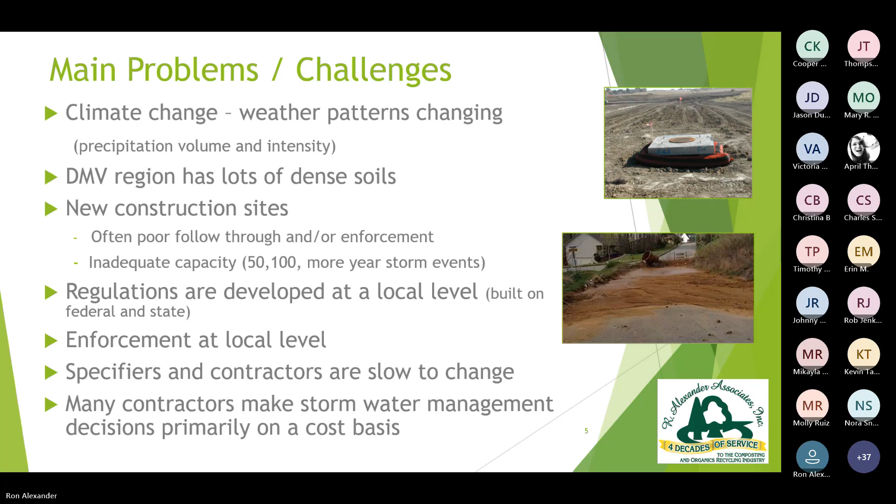I mean, if people remember the major storms we had several years ago in Ellicott City, where there were two 500-year storms within like 3 years, you would think that a lot of states would be ramping up their stormwater requirements to say if you build, you have to have capacity for a 100-year storm. But I was just doing a project here in North Carolina, and we're still regulating for 10-year storms, which is crazy to me. And on top of everything else, amping up stormwater law is very, very slow because it costs money to customers. But the downside is when things go wrong, the damage for not having the infrastructure can be pretty, pretty bad.

At many, many levels of government, we understand that stormwater is a problem. You can even go to the Department of Energy and Environment website, and you can see there's pretty detailed information up there on the concerns and how to deal with stormwater.

And we'll get into it a little bit more, but there are major economic issues as well as environmental issues, as well as clean water issues when it comes to managing stormwater properly. If we whittled it down to three major areas to consider, the first is water quality.

Research has shown the more soil that moves, the more stormwater that doesn't get absorbed properly and runs along the surface of the soil, the more sediment goes along with it. It directly impacts the amount of pollution that gets carried, whether it's pesticides, nutrients, metals. So protecting water quality and drinking water even is a major issue.

Then we have protecting man-made structures, including landscapes. I would argue that improved stormwater on large landscape projects can be sold as insurance, because if we don't absorb water effectively on landscape projects, we have a lot more long-term damage on the landscape projects.

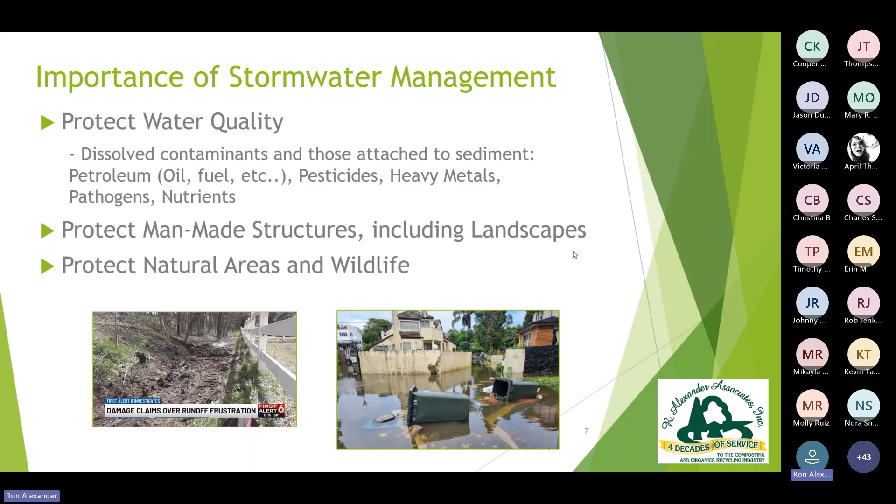And then, of course, we're also trying to manage stormwater to help manage and protect natural areas and wildlife. But there are human health issues related to it also. There's lots of ways to deal with stormwater. Obviously, gray infrastructure is primarily what we've had up until about 25 years ago.

The West Coast, especially the Northwest, the state of Washington, some places can get up to 100 inches of rain a year. Even though their intensity is low, they get a lot of volume. I've done a lot of work out in that part of the country, and we're trying more and more to use sustainable landscape practices, green infrastructure practices, to help manage stormwater.

And of course, we've had great success using these technologies to manage volume, including peak flow, right? The highest amount of flow that happens during a rainstorm, which we attempt to manage, and minimizing localized flooding. And then, of course, we also try to manage the water that moves through those systems and decrease pollution. And the systems work quite well.

We are still working hard at learning and getting better at maintaining the systems. This is something that's often forgotten in green systems, and we are getting better. But the concept of some of the sustainable management type systems is to imitate nature. Our goal here is to create some large stormwater management features that work like wetlands, for instance.

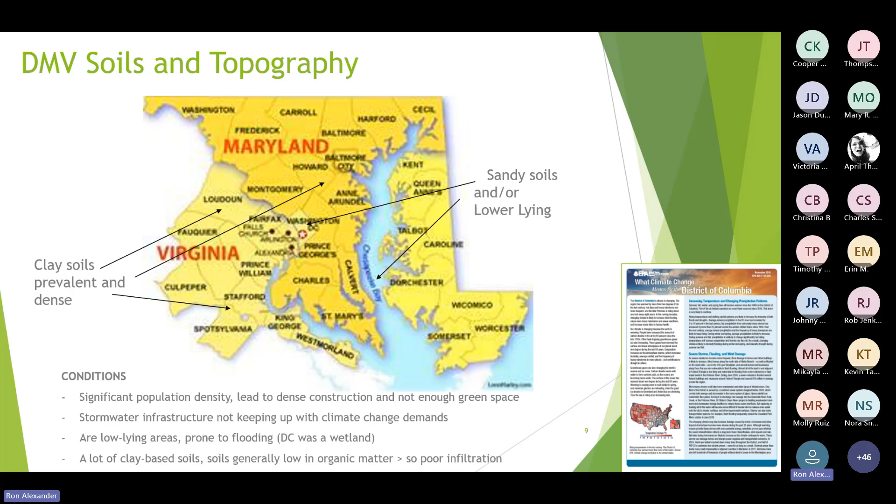Now, going back a few years ago, I did a bunch of work with the Washington State Department of Ecology, and they had major issues with damage to the Puget Sound, which is the bay, which has huge environmental relevance for both people who come and tour the region around Seattle, and also the spawning and the growth of not only shellfish but also salmon. They were looking for new methods to deal with erosion control and stormwater, and they got very, very heavily into creating infiltration soils.

And I'll just mention briefly some of these graphics you see here. One of the things we had to do is educate the construction industry about what really happens to all this water when we start building and we have more hard surfaces. Well, the easy answer, of course, is instead of moving vertically through decompacted soils, the water runs horizontally, and when it does, it picks up velocity and it takes contaminants with it to low-lying areas, often streams and things like that.

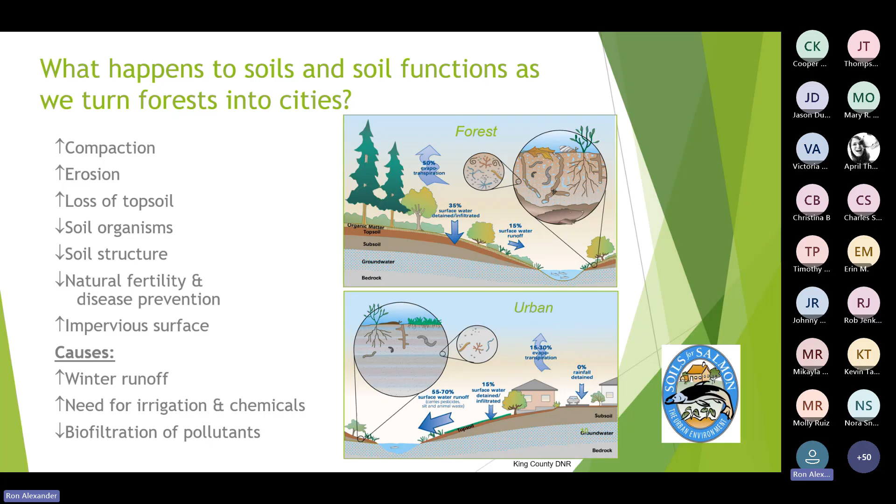So we have major erosion control problems, loss of topsoil, and it causes a whole bunch of issues, including runoff, and the need for more irrigation. If water does not perk, we need more water to grow plants through irrigation. We have more problems with recharging aquifers deep under the ground, and we just have more pollutants moving. So here are some graphics that they've shown. Now, here, impact can be quite bad.

I mean, we talk about things that happen on landscapes, but down here in North Carolina, because we have heavy clay soils like in your region, people have heard about what happened in Asheville. We're getting mudslides. We have the Blue Ridge Parkway, where people come to watch foliage, where parts of the roads were covered with mud or just basically collapsed. So the issues can be small to extremely, extremely relevant.

But when it gets down to construction projects and landscaping projects, if we don't deal with the stormwater, we have unhappy customers. And one of the things we had to do out west, legislation was going to be pushed through that said you will enhance stormwater management, which was going to cost more money. The allowance of using soils that infiltrate, the addition of materials to the soil to improve percolation, was approved as an allowable stormwater management technique.

One of the things that I was involved in doing is educating builders who were going to have to deal with soils differently, but help them understand that they can sell the benefits of this to their customers. And there are landscape architects, landscapers and contractors on this webinar right now. We need to consider the marginal increase in cost to deal with some of these green infrastructure techniques for larger projects, and it is marginal.

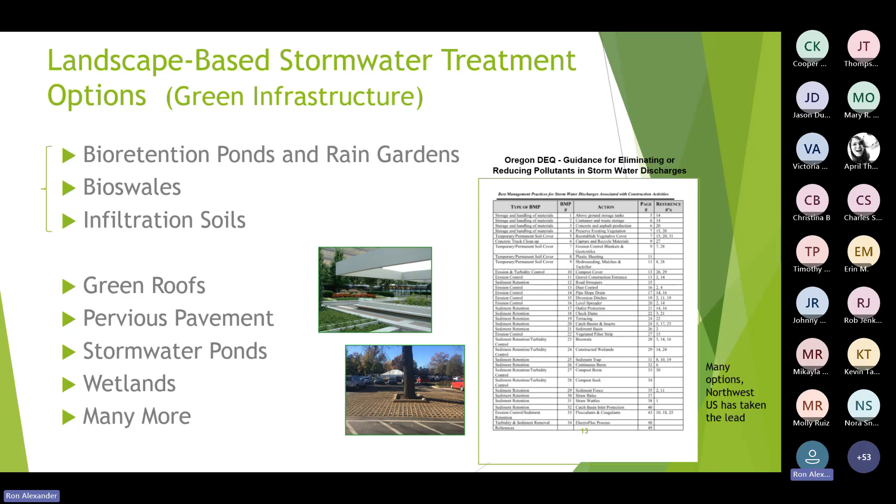Now, on the rest of the webinar today, we're going to talk about these landscape-based stormwater treatment options, green infrastructure. We're going to focus primarily on bioretention, which is extremely popular, and then something that really has a lot of potential moving forward, and that's creating infiltration soils on landscape projects. If you see the document off to the right here, there are a lot of green infrastructure techniques. Each state, and many regions of certain states, have allowable practices that you can gain credits for. And you have to make sure that in your region of the DMV, whichever state you're in, you're meeting the localized regulation.

So bioretention has become very popular over the past decade. It's a wonderful stormwater treatment process consisting of basically soils that perk, with plant material growing in these manufactured soils to help facilitate infiltration, as well as capture, percolation, and also cleaning pollutants. Typically these retention areas are in low-lying areas, so we're using gravity to help get the water gathered. The goal is to make them physically attractive.

However, I will tell you that I've done a lot of work the past 5 years in California, and we have this constant battle with these bioretention features. We have to make the media that perks water, and we're constantly battling keeping enough water in the system to keep the plant material growing. And that's an ongoing struggle with these systems.

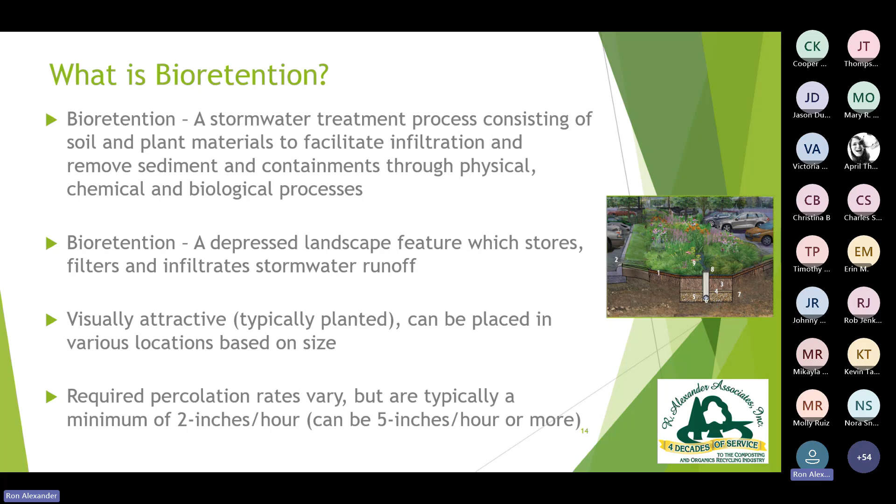And then, of course, based on how we're using the system and what the localized use is, there will typically be a number of inches per hour that the systems will perk. A typical starting point is 2 inches per hour, but it changes based on what you're doing and what your project does.

So typical bioretention features are things like ponds and basins. Smaller versions are, of course, rain gardens. And then we have bioswales, which sometimes infiltrate water, and sometimes infiltrate water and carry water to the larger system. I'll show you a couple pictures of them. But the weird part is that the terminology, if you go to different states and state regulations, these definitions and terms are swapped, which makes it a little bit confusing. But we'll move along anyway.

So here's a great graphic. This is something that's online. This picture is used in many educational presentations, but it's a typical bioretention feature, and it outlines the components. We'll just go through them quickly, and we'll get into a little bit more detail in a second.

So, first of all, you have a bioretention media, which obviously has a lot of sand, coarse textured mineral material in it. On top of that, we have a layer of mulch, which helps protect that layer from erosion and other things. It also can bind metals and such.

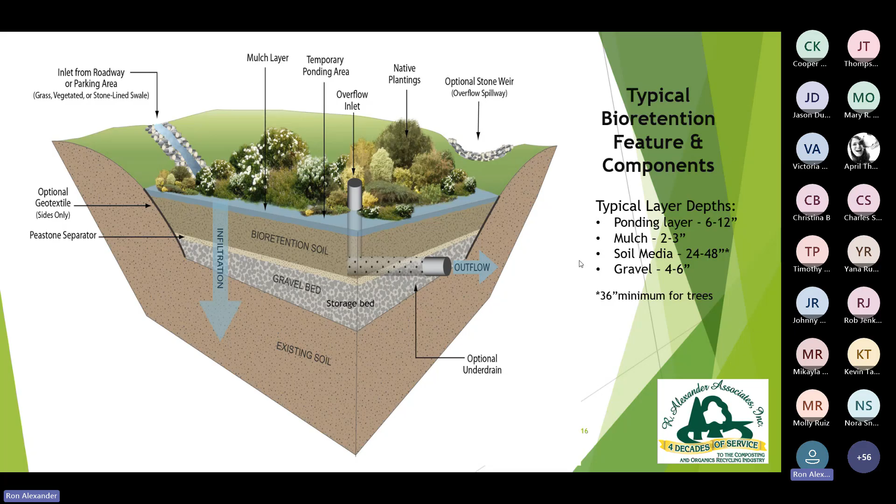So this is a detailed design here. And what you notice to the right here is the general depth of the different layers. Okay, so the design itself should, when done properly, significantly reduce runoff to a site. Water is lost or managed through the bioretention feature through evaporation, through transpiration, water that moves through plants, right? And then the infiltration.

Obviously, if we do it well, we're managing the volume of the water as well as water quality. Keep in mind, certain systems are built with deeper retention areas of media, or water that moves through the media slower by design, to improve capture of certain types of contaminants that are maybe relevant to that specific environmental area, right? So that would be designed based not only on the size of the feature, but the depth of the media and the capture area. It will also be related to the density of the soil below the feature.

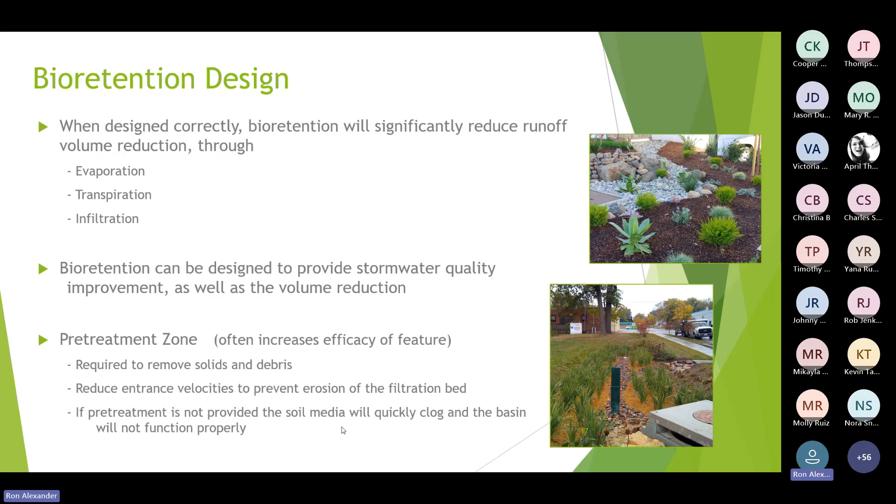And here's a quick comment about that pre-treatment zone again. We very often use rocks and such to slow the velocity of water down, and basically flocculate out some of that media or soil.

Obviously, one of the things we want to have in the bioretention feature is vegetation. We more and more move to native plants, those that can use nutrients that get into the media and don't need a lot of fertility. Also, ones that have deep rooting to help keep the percolation of the media intact, and ones that can be visually appealing based on season of the year.

The mulch layer, again, a key aspect here is to try to use a mulch that is what we call a non-floating mulch, which is a misnomer, a less floating mulch. We try not to use rocks as mulch in these systems. We want to use a mulchy material; stringy materials that hold together and that are a little heavier are often better as they don't float out of the feature. And that's a key aspect of it. So some of these dyed mulches that are very high in carbon, you don't want to use them because they will readily float.

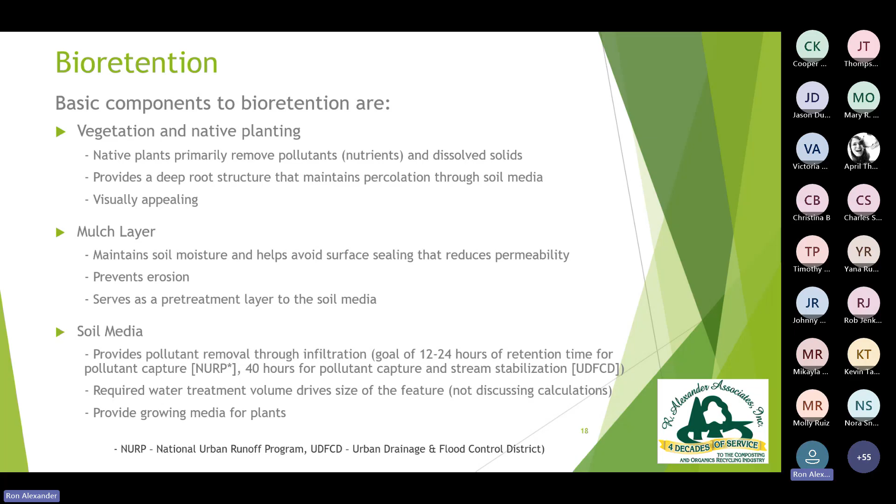Okay. The soil media we'll get to in a minute, but the goal here, of course, is capture and percolation and cleansing, pollutant capture, right? And provide a good, solid growing media for the plants. There's always a controversy pitting the type of the media, the organic content, the potential nutrients in the media, and the health of the plants. And it's a really problematic balancing act that we have to do as we're using these systems.

Again, you can see off to the right there the media going on top of the storage bed, which in this case is a very fine gravel, and also holds an awful lot of water. And again, the two other infrastructural aspects to deal with excess water are potentially under drains and overflow structures, and we don't install them in every application.

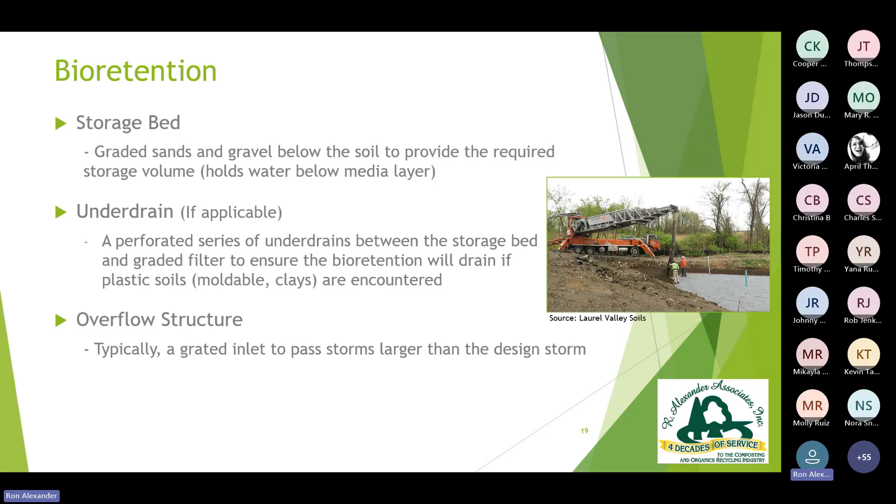One of the key components to the system, of course, is the media. The media is primarily sand-based. It can be anywhere from really 60 to even 80 to 90% sand. Soil is often also specified in the mix. It's typically 2 to 3 main ingredients going into the media. We'll get into that in a second.

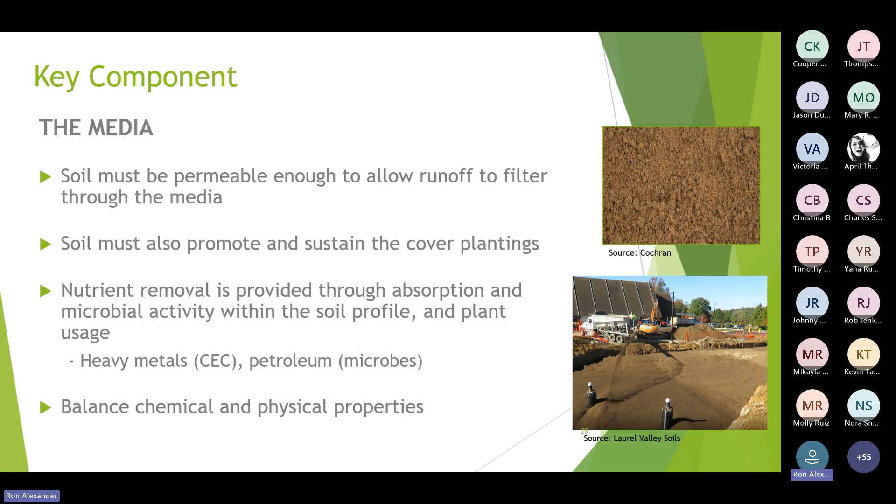And nutrient removal is provided primarily through the absorption to the media and microbial activity, as well as plant usage. But certain numbers of contaminants can potentially leave the systems. And so it's a balancing act to get the highest reduction levels of nutrients and pollutants and keep that system and the plant material growing and the system operating at high efficiency.

Here's a localized spec from the DC DOT bioretention specifications. You'll notice that, again, what I mentioned a little bit earlier, the media is typically 60 to 80% sand or fine gravel. You want to minimize the amount of mineral fines in the mix, which could potentially clog up the movement of water or crust the soil surface.

Down here in North Carolina, we've built a bunch of bioretention mixes, and we tried to get organics out of some of these mixes, and we put clay in instead, and the tops of the bioretention features basically seized up and crusted off, and the systems were not functional. So we're constantly learning how to improve these things. We don't have all the answers. We're getting better and better as time goes on with this.

One of the struggles I've seen across the country is the specifying of the soil component. Typically, there's 2 to 3 components in the media, and getting the soil, which is typically a sandy loam or a loamy sand. In some areas of the country, we just have a really hard time getting soil that meets the spec. So in those cases, we sometimes have to drop down to 2 major ingredients, the organic section of the mix, and then basically coarse sand.

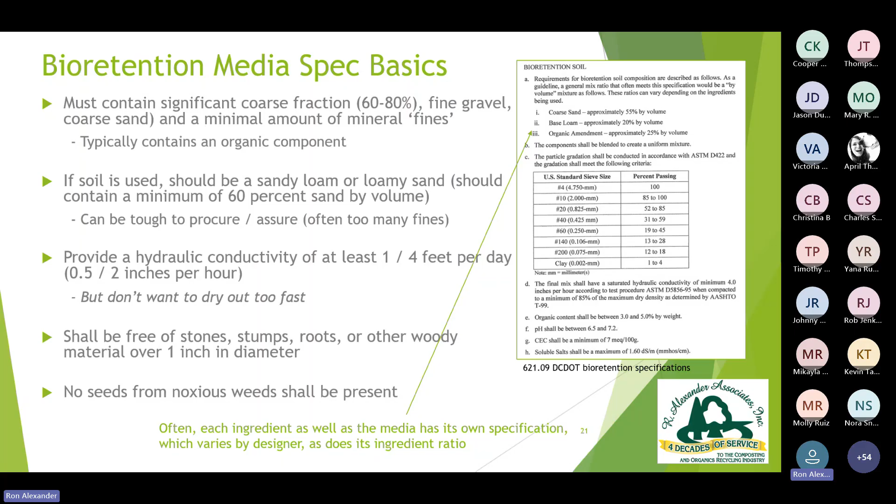And it is important to know that some of these specifications can be quite complicated and problematic to meet. Very often you see the 3 ingredients in that DC spec, the coarse sand, the base loam, and the organic material. Very often all 3 of those materials have their own specification, and then the final media has its own specification. Okay, so it can be quite trying to meet these specifications. And then on the bottom of that spec, you can see things like pH and CEC, cation exchange capacity, right? Salt content, which are relevant to helping the plant grow.

It is important to know that some of the specifications that are written can be quite complicated, and sometimes we have additions. I don't like using the term pixie dust, but we have little minor ingredients that are sometimes added. The new material that's starting to be added are things like biochar. I do not consider that pixie dust, but we're still learning how to use that. I actually think that that's going to be a great additive along with an organic fraction that could potentially degrade a little quicker, the biochar a little bit slower, but we're still learning about this.

And the more complicated that we make the media without really good data backing up what we're doing in that design, the higher the cost, the harder it is to get companies that will actually bid on projects and build those mixes. So we have to be careful and smart as we're designing these mixes.

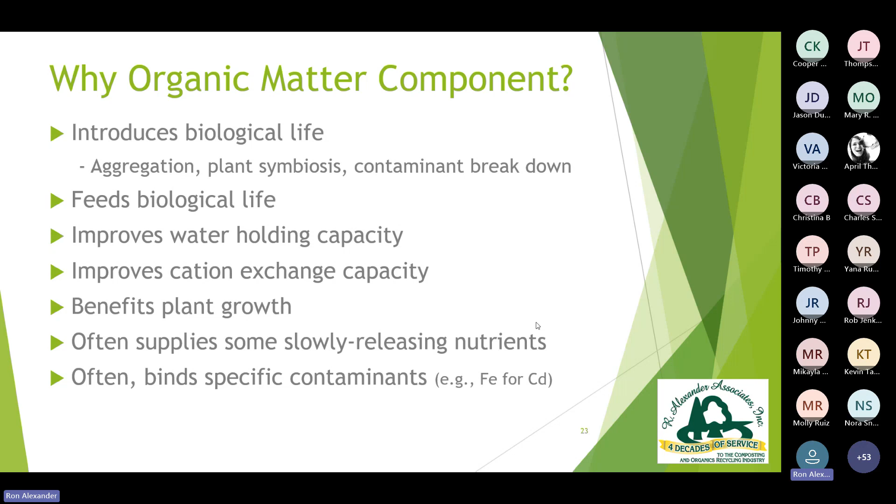And some of these materials provide slowly releasing nutrients. We'll talk about this more in a little bit. And some of them actually have certain metals like iron in them that are really, really good at the capture of other metals like zinc and cadmium. Okay, so there's a lot of benefits, a lot of reasons why we use these materials.

Here are a couple standards from the DC DOT manual. Again, there's compost, which has been used for years now, off to the left, as you can see, and then there's an alternative material which Bloom Woody Blend actually meets and is currently being used for. So these are already being spec'd.

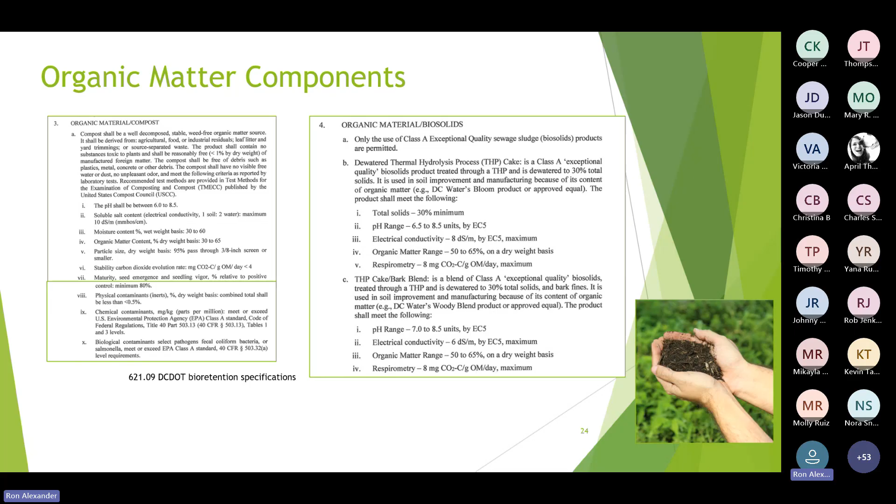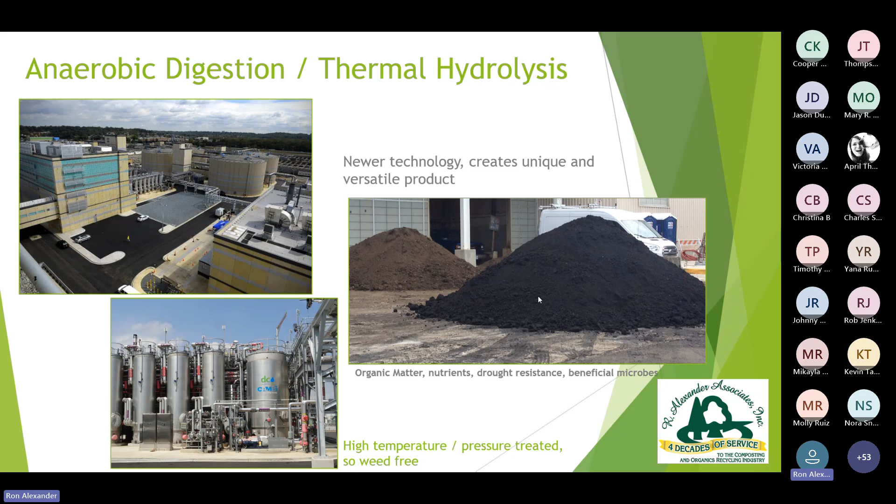The Bloom product is a rather unique material. It's produced by DC Water. It's made out of biosolids, which is processed through high pressure and high heat, which essentially pasteurizes it. And you can see this pile of the dewatered material right there. It's pretty high in organic matter. It's got a bunch of nutrients in it, but they're in very slow release form. We have pretty good data on that. It also has a decent amount of iron in it, which is good for pollutant removal.

They produce a product which is 50% Bloom and 50% bark, which is used as a compost alternative in many applications, including bioretention. That product is being used almost exclusively out of the Bloom products when it comes to designing bioretention media. And this material has a large amount of bark in it, which has a high carbon content, so it helps the C:N ratio to reduce the movement of things like nitrogen. The material also has phosphorus in it, but it has an exceedingly low percentage of water extractable phosphorus, under 1%.

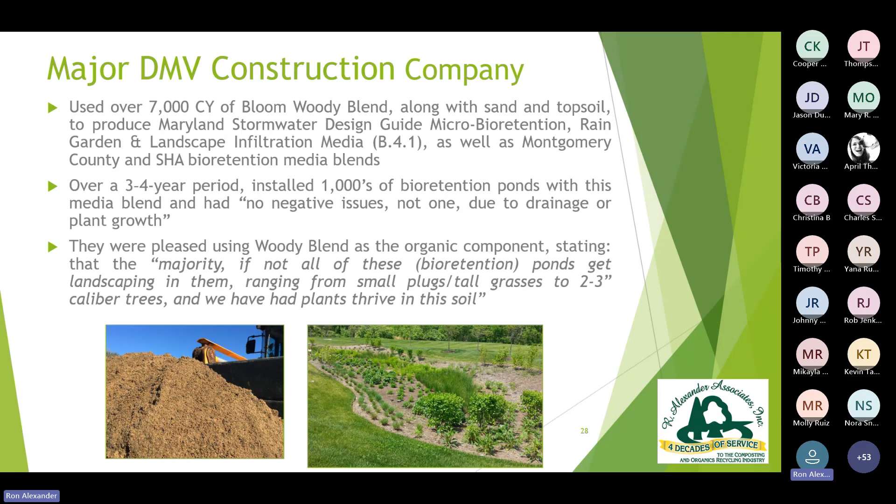The Woody Blend, again, is being used or has been used in the past by some major construction companies in the region. Over the past several years, there have been thousands of bioretention features that have been developed with the material. You can see a quote here near the end of this slide. We're not naming the contractor on their request, but they've been very, very pleased with the use of the material, the functionality of the feature, but also growing the vegetation and keeping it alive. We have to remember we want deep growing plants in the features, and we want to keep those roots growing, and that keeps percolation rate up and infiltration rate up in these systems.

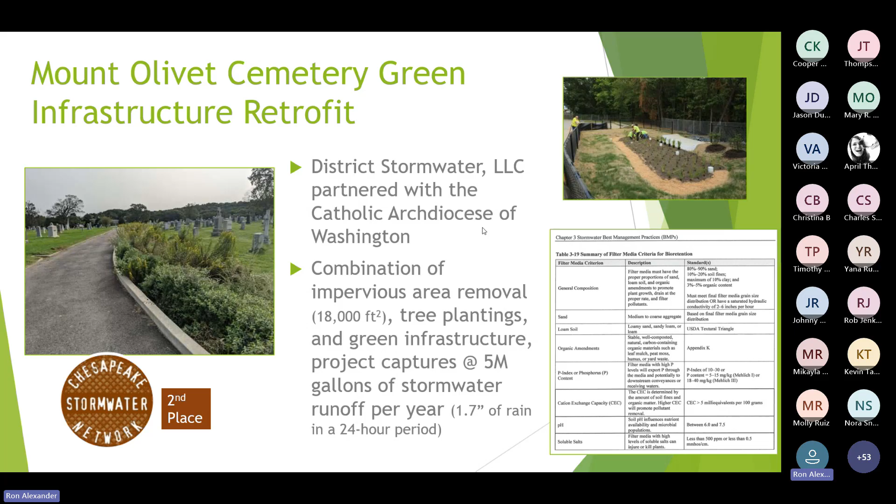Okay, very, very famous cemetery in DC. They're following one of the local standards of sand, soil and organic matter in this mix. This is a very interesting place to visit. There are a series of bioretention features throughout the cemetery. They've had great success in implementing this project. Obviously, they got some outside funding to make that happen. One of the reasons it's interesting to mention this one is because the Bloom Woody Blend was actually used to top dress the turf. They had problems with keeping turf on this site, poor soil conditions. So they top dressed and they seeded into the Bloom Woody Blend.

Interestingly, Pope Francis has pushed the church on the sites that they manage to use less petroleum-based nutrients. So I don't want to say that this process was Pope Francis approved, but I'm going to say that even though it's not really true. Okay, it's not really true, but I'm just going to say that using products where the nutrients are released very slowly from carbon-based materials is a great benefit.

Of course, the interesting thing about using Bloom on these sites is that it has slow release nitrogen. Under 5% is readily available, but it has a bunch of iron, which also helps the chlorophyll molecule, so it keeps the grass pretty green, which is kind of cool.

There are a lot of other examples of bioretention projects in the region, and the Chesapeake Stormwater Network had a wonderful best of in 2023. The University of the District of Columbia built a bioretention. Basically, they created a planting area that would absorb a lot of water, captured underground in a cistern, to deal with a parking lot that was kind of flooding the area. They've had great success with that. They used the Bloom Woody Blend in the media.

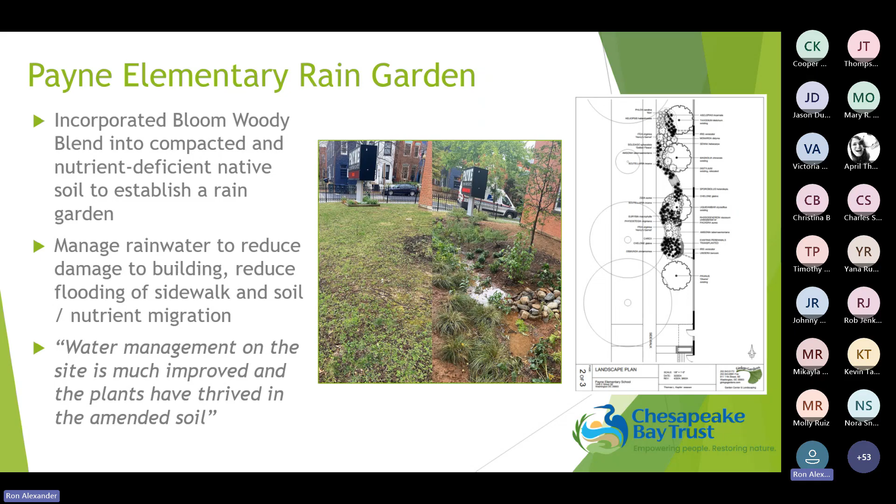This is a project, I think it's the last one I'm going to mention here before moving on, that I was involved with in North Carolina. The town that I used to live in and I live in again built this magnificent downtown park. It's a 3-level park. And we had such stormwater issues in this part of town that the park was built partially to build in excess infrastructure for stormwater. If anybody is interested, I wrote an article about this that's quite detailed.

So this is actually a wonderful example of creating a park, but fixing a problem for a part of a town that didn't have enough stormwater capability. And where we live in North Carolina, the soils are so dense that our problem with climate change is inland flooding and mud. So this is a very, very cool example.

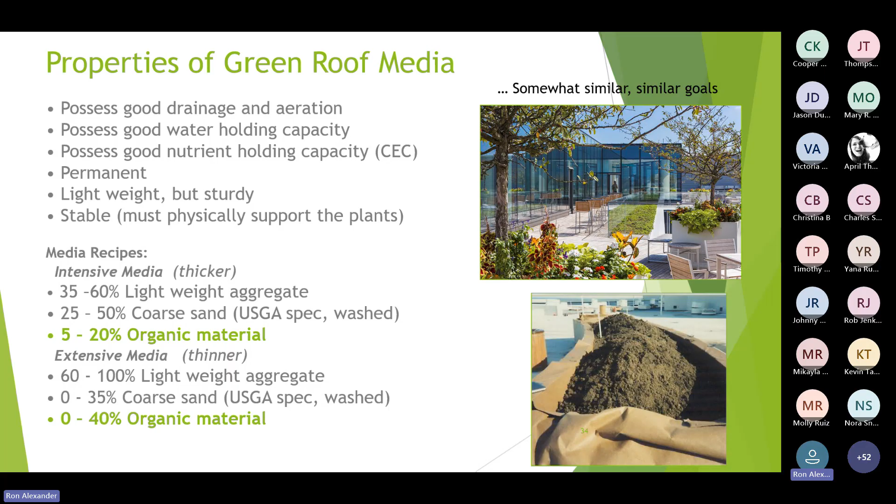And they use organics in the mixes, but they usually use lower volumes. Typically, the thicker the mix on the roof, the more organics that are used. You've heard the terms intensive and extensive media, but that's not our discussion today.

I know that nutrient movement for some is a concern. So I did a project for the state of Minnesota that had to do with dealing with the migration of nutrients from bioretention and erosion areas. And there are some smart BMPs that we can use to help manage nutrients in these systems, like using native plants, making sure we have a good stand, establish the vegetation as soon as you can. Don't use more organics in the media than you really need.

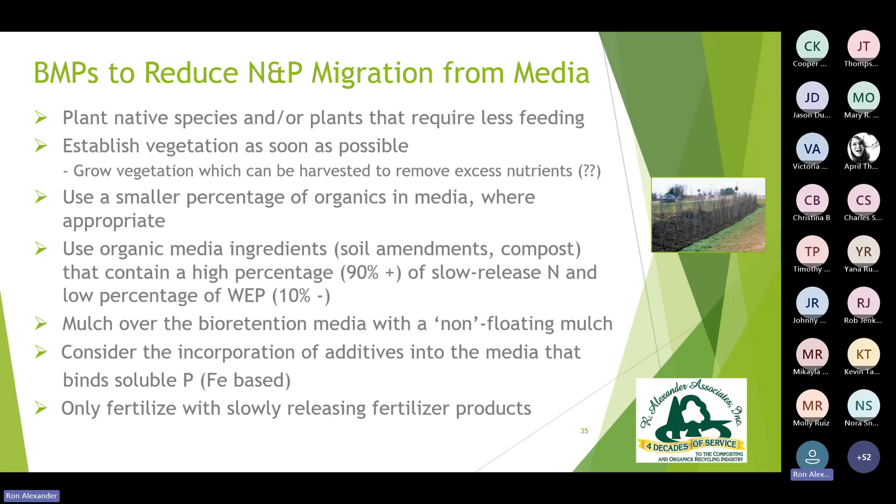I would argue that one of the things we should be doing is looking at the slow release nitrogen content and the water extractable phosphorus content of the different ingredients in the mix. And it should be noted that even things like sand and other ingredients of these mixes, a lot of nutrients don't come off of them often, but metals do. So there are materials that leach, and we should be testing these materials and knowing what we're putting in the systems. And then you can see there are potentially iron-based additives that you could possibly add to some of these mixes.

It is important to note that where the research has been done, and some of it has shown that we do have some nutrients that leach, they do reduce over time. And we have to weigh that concept of the organics and the nutrients in the organics with the fact that we have to keep the plants alive and the plants need nutrients. So we kind of have to just be realistic about what we're doing when it comes to design of these mixes.

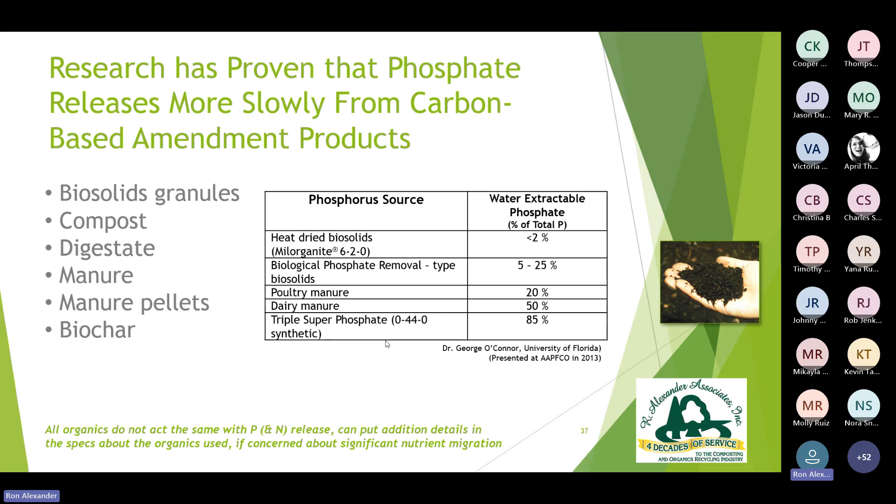We're not going to talk about this because time is getting short, but I did a lot of research on testing different organic-based materials, and we can test these materials for quick and slow release nitrogen and water extractable phosphorus. Look, this is compost research I did, and the phosphorus in compost is only about 2 to 20% available in the first year. Bloom products are a fraction of that.

So we have to be realistic when we talk about nutrients, because we don't want to make a mix that's void of nutrients and then have people pump in chemical nutrients on top that are much more mobile in water.

Okay. And finishing up here, I want to talk briefly about the creation and the use of infiltration soils. Some of the mixes are in the planting areas. Maryland has designs for these things that look very much like bioretention soils, but in many cases, we're just adding organics to dense soils. We don't add sand because sand is much heavier and much more expensive. And organics can actually create porosity in the soils while holding water when it's dry out.

Now, obviously, the denser the soil, the less they perk or infiltrate water. We want to be able to capture as much water as we can. It's not a simple thing to do. Remember, the more we build, the more hard surfaces, the more water is going to hit the hard surface or even soil that's compacted and move laterally. Our goal here is to try to create soils that are difficult to compact, and there may even be a requirement to decompact it over time.

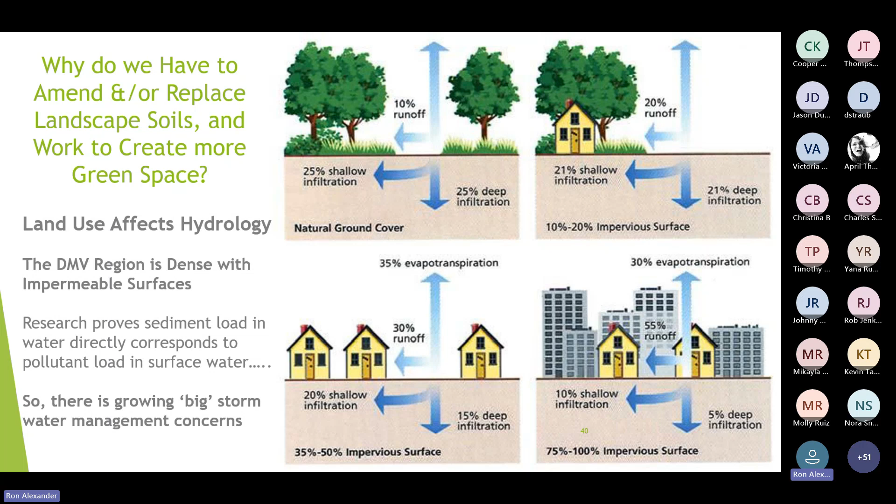I will say, if we're serious about dealing with stormwater in cities, I think we have to consider putting thicker layers of finished soil down, not just 6 inches anymore, but to expand that up to a foot. And that could help us in stormwater capture that's being experimented with in other parts of the world and to great success.

Remember, these infiltration soils, the goal here is to not have them crust on the surface, to accept water, to store water, to allow infiltration, to remediate the water as much as possible, and allow for recharge into aquifers while we're allowing vegetation to grow. Because if we don't have vegetation growing, we're going to have erosion, and that modified material that we just created is going to start pushing off the site, right?

Remember, the coarser the material, the more pore spacing that we can create. If it's not a sandy soil, it's hopefully through microbial aggregation of the soils. The more water we can perk, the more water that sits in between particles and will move through gravitational flow after the site basically meets field capacity. Okay, remember this.

Native soils typically have better structure, which means they have more air pockets, which means they're lighter. As we compact soil and you look at a specific area, basically what that means is we're mushing the structure, we're losing air capacity, the soils hold less water, they hold less air, and you have more density because you have more soil particles in there.

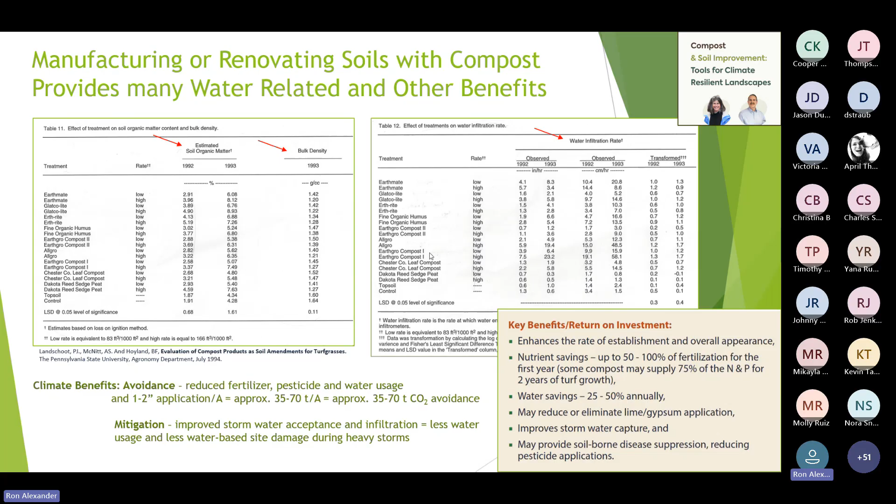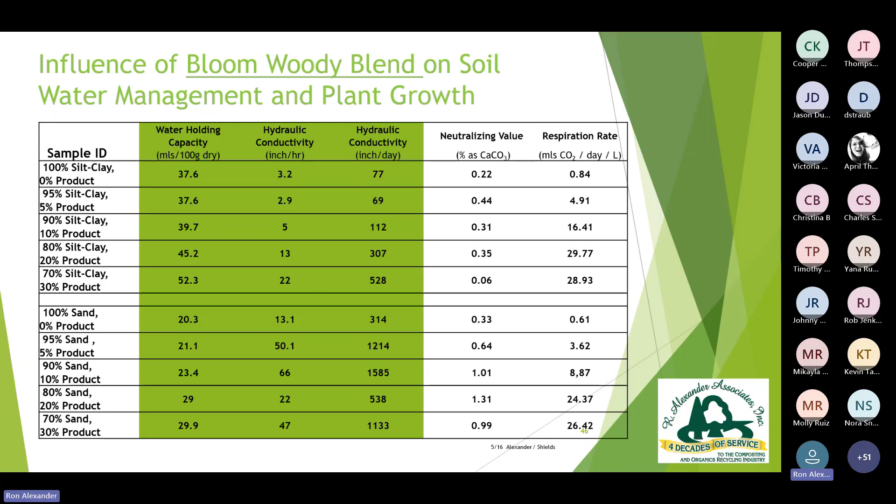We've done research with Bloom Woody Blend. They work the same way. You add them to soils, you increase water holding capacity, you lower bulk density, and you increase hydraulic conductivity, the percolation rate of the soil, right? I want people to think about the fact that this is one of the things we need to do more of.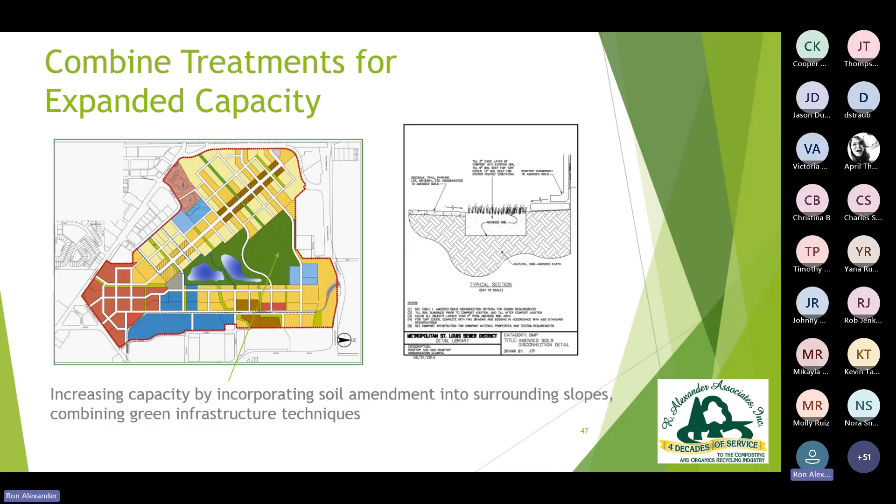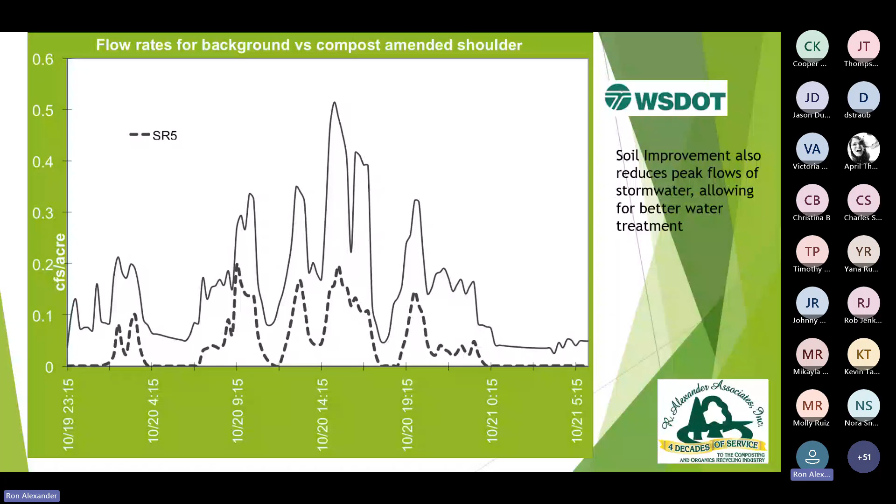One of the big problems, whether it's a gray infrastructure or green infrastructure, is trying to manage peak flow where the highest volumes of water hit the management areas, okay? And we can't absorb it fast enough. So lots of times when we create these infiltration soils, it can reduce peak flow and the pressure on these systems, which can be overwhelmed at times.

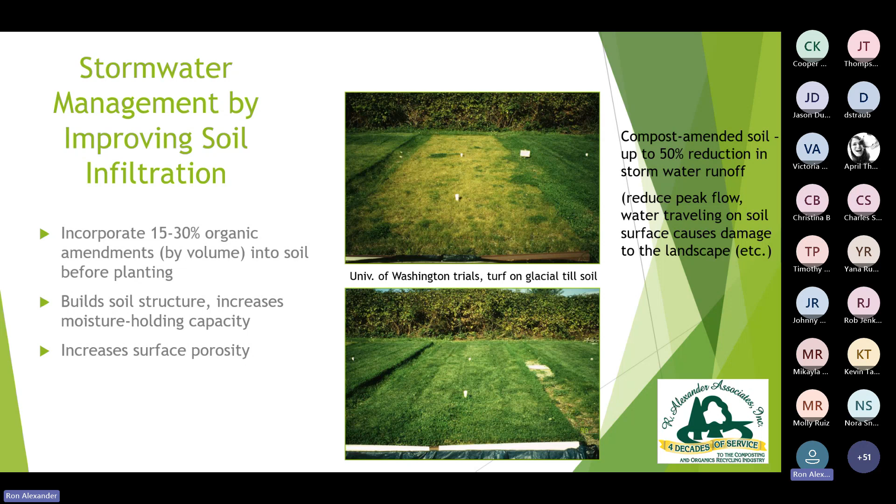And there's been great research done showing the incorporation of organic matter, the creation of pore space through aggregation is a great benefit in the reduction of stormwater movement off these sites. BMPs are starting to be produced that give us stormwater credits all over the country.

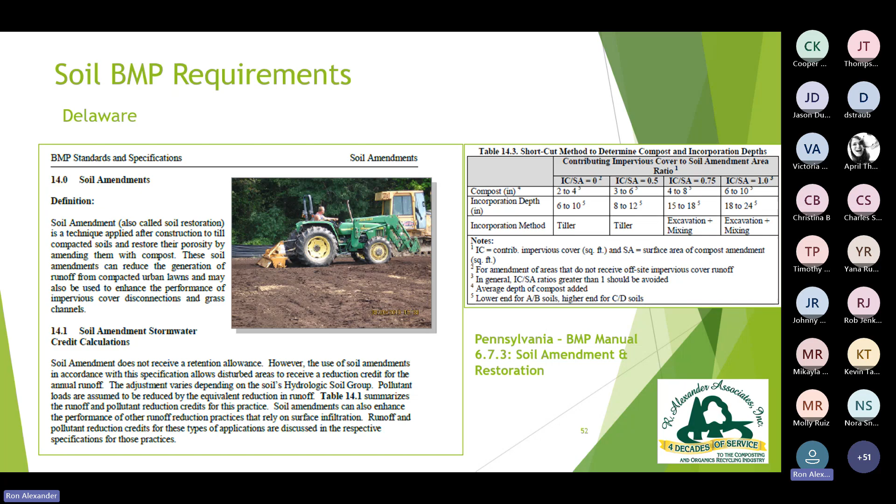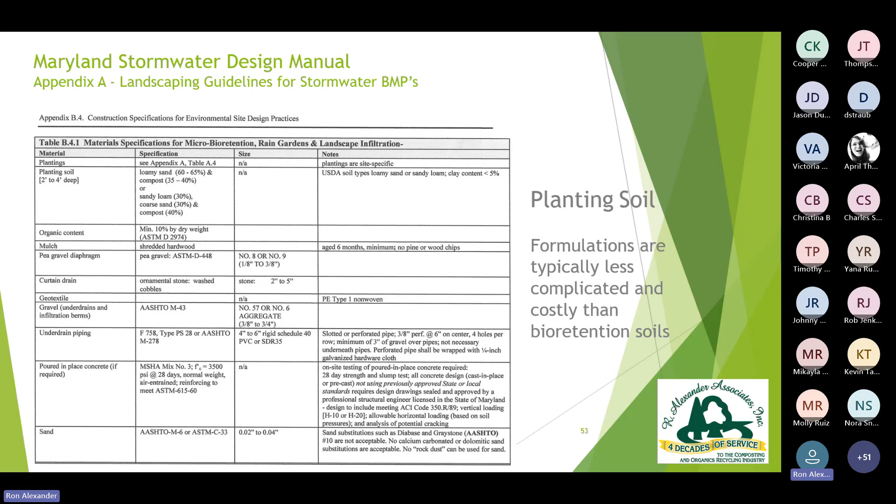Here's a couple more local in Delaware and Pennsylvania, and even in Maryland, where we're designing planting soils out of sand-based materials to help stormwater management, kind of like the project I worked on in North Carolina. We're seeing these happen more and more. So they're wonderful techniques, and a lot of these techniques can be used together and teamed up.

Final thoughts very, very quickly. These green methods can be very, very effective and creative in managing stormwater volumes. They can be very, very good at improving stormwater quality. We do have a major problem, where climate change is moving faster than regulatory change.

So there's a lot of sites that do not have enough stormwater capacity, and it's something that we're going to have to concentrate on more and more. And there's a big, big room for catch up.